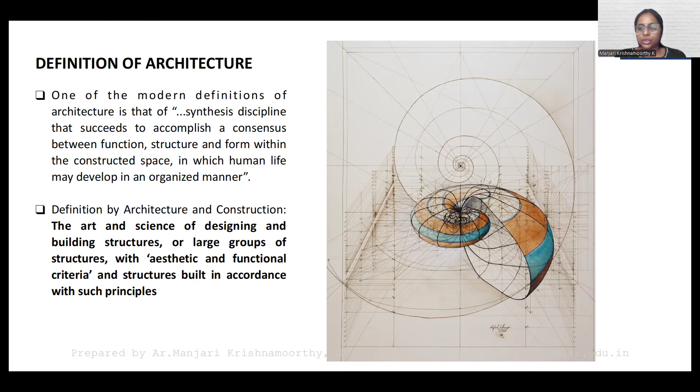So, talking about the general definition of architecture, it is also the art and science of designing and building structures. And also, it need not be just one building structure, but a large group of structures. It will also have aesthetic, functional criteria, and structural components in accordance with several other principles that we will be studying.

So how do we actually approach the definition of architecture? It can be an organic entity, and it can have multiple components. For example, like how a human portrays himself - we dress up, we have accessories, we have shoes. Likewise, a building will also have an entity where it has a form, a function, a structure, skin, and several other materials used, and it will have circulations - a basic character that identifies the building or the built structure.

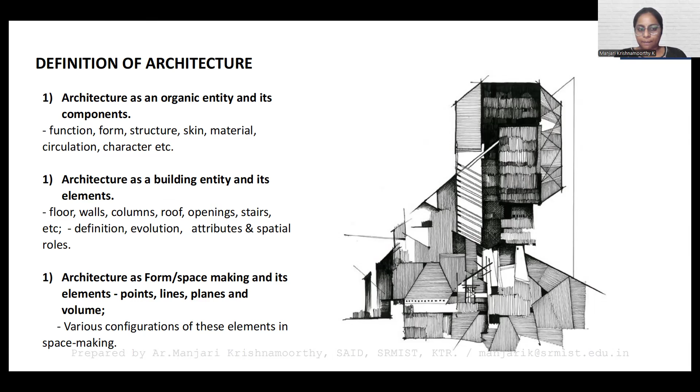And it can also have several other elements. When you talk about a building, it will have floors, walls, columns, roofs, and several other attributes. Talking about the way in which it takes form - is it a rectilinear building? Is it a circular building? That is the way of how space making or form making happens. And this will have components of a line, plane, and volume.

So where exactly did architecture start? Talking about the origin, we all know how human evolution has started, about how humans started living in caves and how from caves we have transformed into different mediums of shelter. So when shelter comes upon, that is the natural way of how we improve man's action with the configuration of the land that we get. So we started living in huts, nests, tents, and then we started making our own structures, built forms as such.

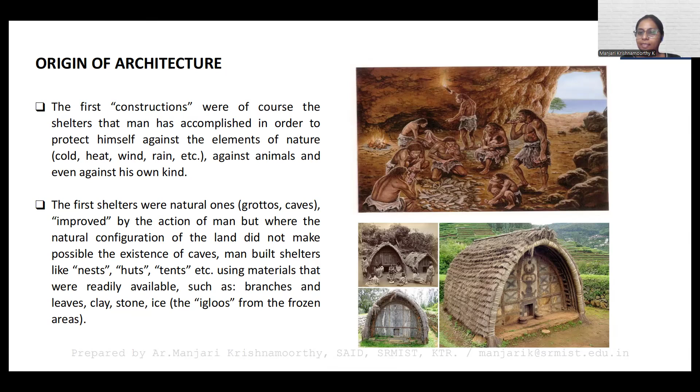So, based upon different situations and different climatic considerations - in a place like a desert, we started finding shelter in caves, whereas in the cold region where ice is, we started building igloos. So trying to make the composite of what exactly the built and the surrounding situation is all about - that is how the evolution starts.

So this goes on for generations and generations. In the first generation, approximately in 3000 BC, we started knowing about the ziggurat forms in Mesopotamia, and we also know the palaces of Babylon, all the Hindu temples of India, the pagodas, the palaces of China, Japan. So all these, the Mayan and the Inca civilizations have monumental temples that are there in ancient Greece. These are categorized as the first generation where the origin of architecture began.

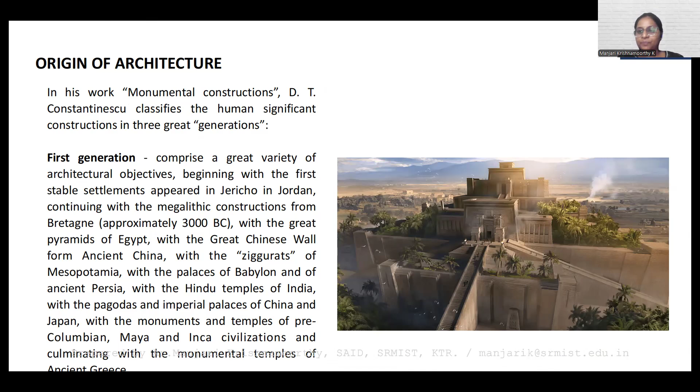And in the second generation, we started to explore more about building materials - not only stone construction, because that was locally available there. So from taking the basic constitute of stone, we started making bricks, handmade bricks. That becomes the masonry type, the concrete. So that's how, from the basic structural element, we started developing into different architectural typologies.

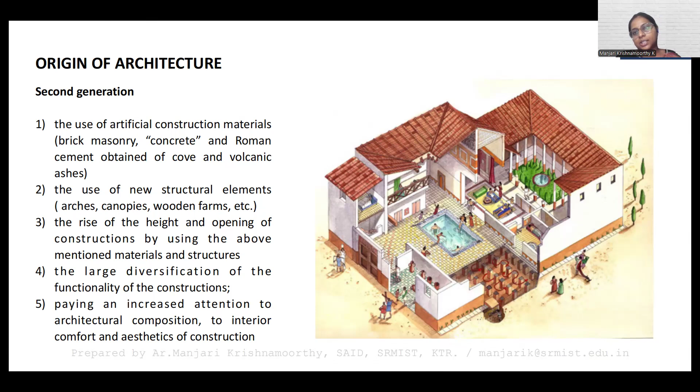Whereas arches started to be built using wood, and we also tried to raise up the shelter - so the covering that the built form would need. This is how the diversification of the functionality of construction technology had started in the second generation. Whereas in the third generation, we started to explore more about technical advancements that we have, like how post your industrial revolution, machineries had helped us.

Reducing the human load, but also increasing the productivity.

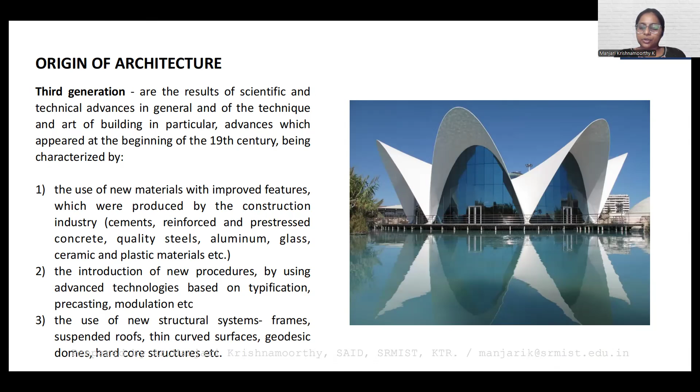So in the 19th century, what happened? We saw new materials like glass, cement, quality steels, and aluminium improve their features in the construction industries. Applying these technologies, we influenced our materials into advancement, with typologies of precast, modular structures, space frame structures, exploring different forms. These are categorized in the third generation. This is how we have seen the passage of evolution.

Talking about the context, what exactly does a human need? A human will have basic requirements—either influence, whatever I see, wherever I get inspired or influenced. That will help me lead to a concept or a style.

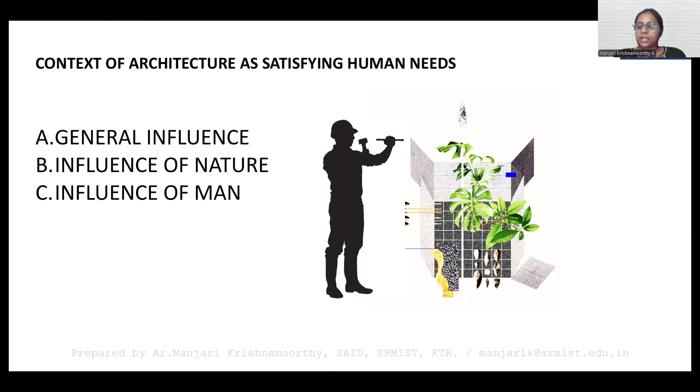And what does nature give? We are not totally depending on the aesthetic side, but also trying to observe what nature gives us and what we give back to nature. And the influence of man—what are my likes and dislikes? These are the categories we personify ourselves into as human needs.

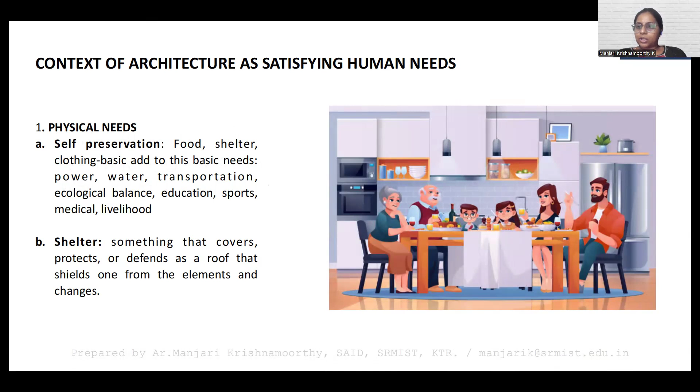Talking about physical needs—what do we need for survival? Basic clothing, transportation, power, electricity, ecological balance between nature and environment. We need good education, medical facilities. Above all, this happens under a shelter—the basic necessities a house would need.

Just by building a structure, we won't be in comfort or safety, but we will also need aesthetics and some protection, in the form of construction. This can be doors of different types, sanitation facilities, and windows, because we need maximum natural ventilation, air, and convenience.

When we design, we always consider the movement or circulation within the house—how do I move from living to the dining space? How is the kitchen closer to the dining space? That proximity gives convenience to the users living there, and that gives us comfort. For example, in a hot region, air conditioning will be one solution we look at, giving comfort to the user's criteria.

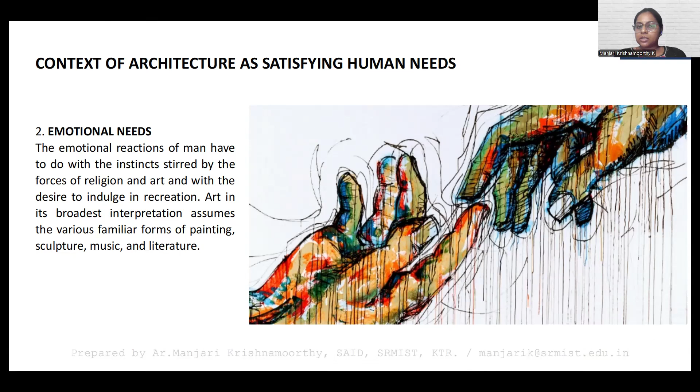We also have emotional needs—the preferences that a human would have. I might like my room painted blue, or I might want a rustic feel given to the structure. So humans also have emotional needs, which enhance creativity but also give equal comfort when they get exactly what they need.

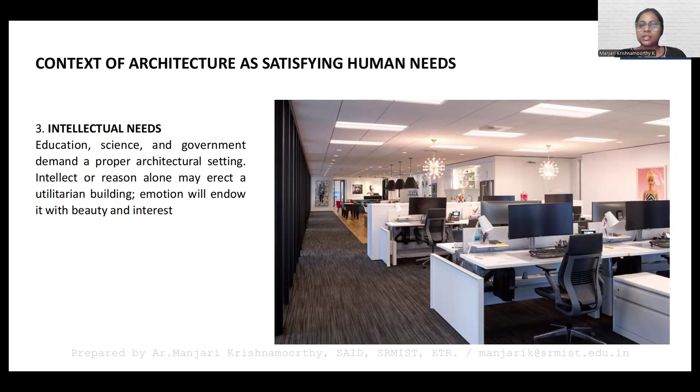And intellectual needs—apart from any building setup, we also have an intellectual part. It has to be a utilitarian building, meaning buildings used by humans that solve a purpose, while also trying not to compromise the beauty or aesthetics of the structures or interiors.

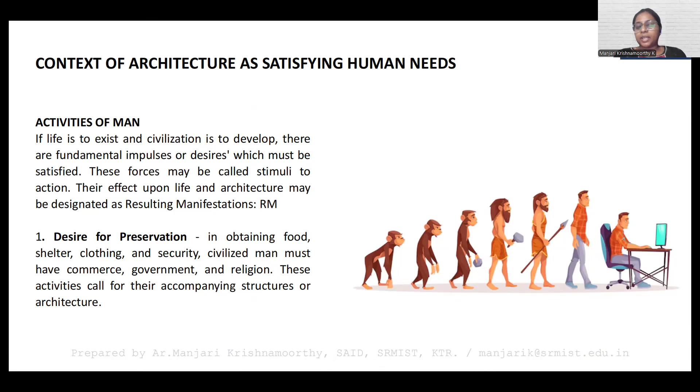Talking about the whole context of how architecture has evolved, we observe certain points like how we aspire to be—starting from the desire of preservation, meaning starting from clothing, the type of civilization we live under. We also have recognition—any man will have a status, position, or ambition toward their social and societal life.

So we will have a struggle in gaining a position, and we always try to keep upgrading ourselves. From a person, we develop into a graduate; from a graduate, you get a job. There has to be some evolution that takes us through all these communities.

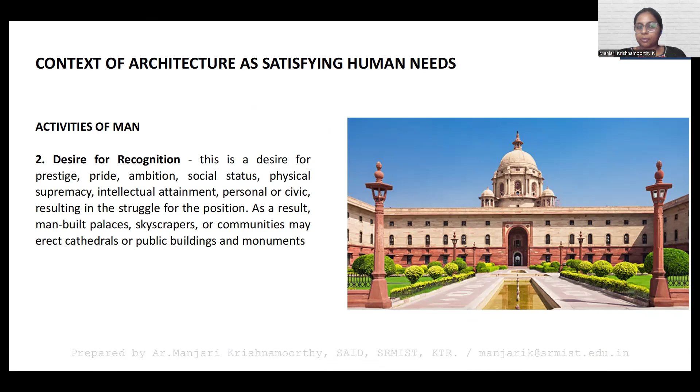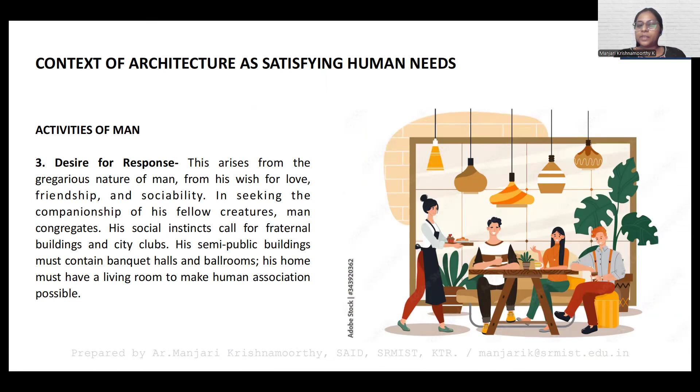And also desire for response—meaning we try to have a bonding with the local, build companionship with our fellow creatures who are with us, and build more semi-public buildings. So not only as a personal confined space, but also trying to have a whole living within the existing society.

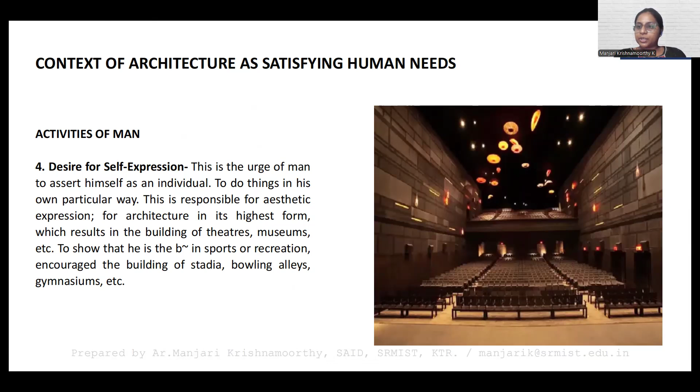And also self-expression. Self-expression is the urge of a man where he asserts himself as an individual. So at the highest level, we try to build other aesthetic facilities like theaters, museums, all these public spaces, sport arenas, which will always try to habituate. For example, I might have a habit or passion towards sports. So all of these semi-public buildings will also provide for self-expression, where we are trying not just to confine within living walls, but also to explore.

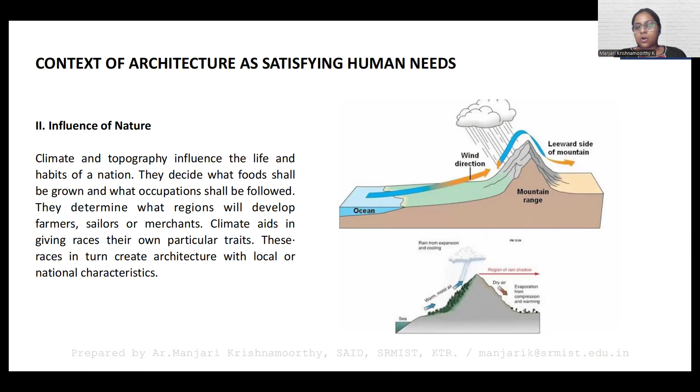And then on top of all of this, there has to be an influence of nature. Without nature, we cannot live or coexist. So climate, topography, all of these influence our life and the habits of a nation. What kind of climate do we live in? What kind of seasonal changes do we adapt ourselves to? So all of this creates an architecture with local and national characteristics.

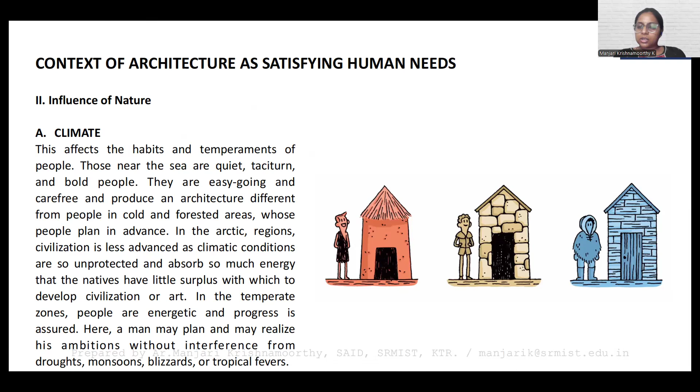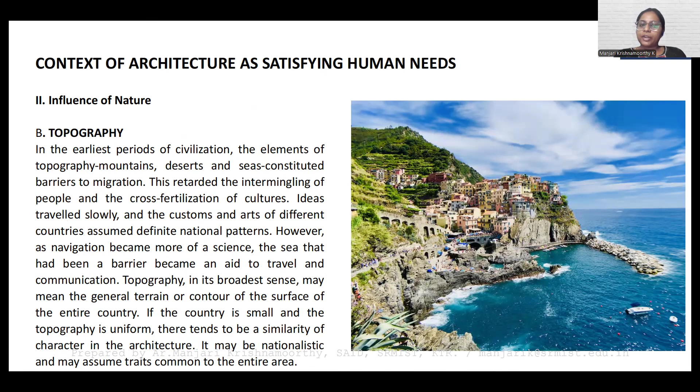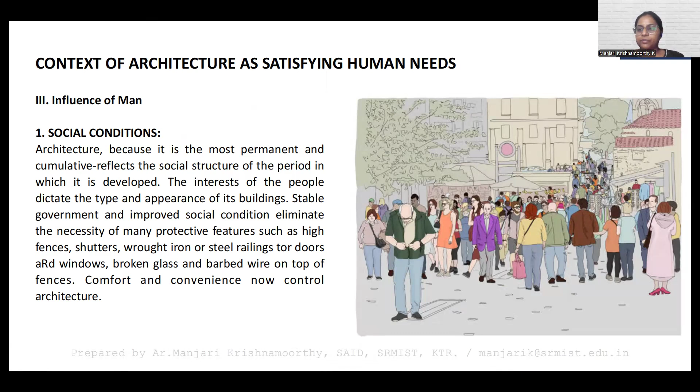And the social conditions of man, where we try to have permanent settlement and also reflect the social structure of a period that is developed. You can also see how people can dictate the appearance of buildings - if you take the city fabric of Amsterdam, you can see the language of how the buildings are throughout, but they have similar characteristics retained throughout the whole city. That exactly helps us understand the social condition.

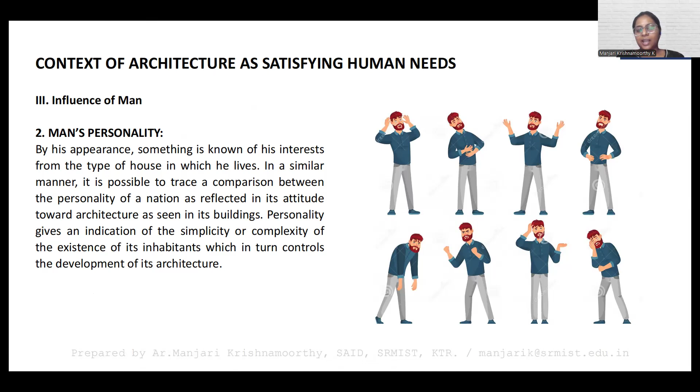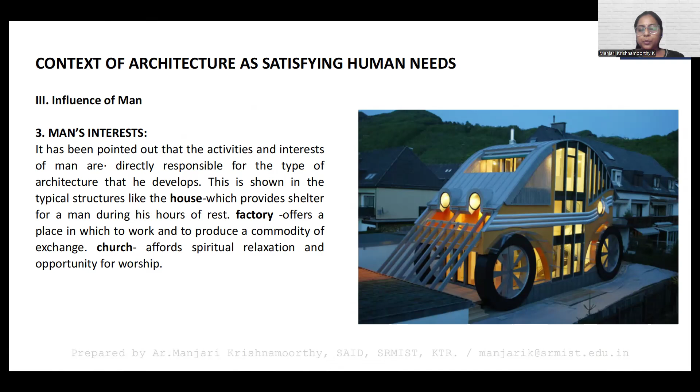And then the human personality. If you compare yourself with the personality of a nation, where exactly do we live, and how does architecture affect them - either in a simple way or through the complexity of how the existing inhabitants try to control the development of their architecture. And then interest, as you can see in this image, like how I want my house to be - I want it to look like a very minimalistic structure. If you take the example of Robert Venturi, he created something like a duck house where the structure itself resembles a duck. So everybody has their personal preferences in how they want their structure to be - that exactly is man's interest.

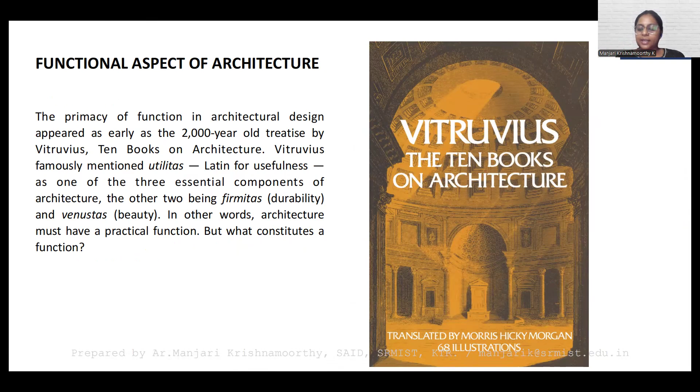So now we are getting into topics of how exactly all this theory begins. This is an example of a very useful book, and we also have the book by D.K. Ching, Form Space Order. These are the bible books that any architecture student would definitely need for reference. Throughout the passage of the 5 year course, these are reference materials to understand the basics and fundamentals.

So this helps us understand what exactly is function, what exactly is your user - who is your user, and what does he need. So use, and now we are going to see points of how the functional aspects of architecture exist - use, user, and function. Function can also refer to intentions where you're trying to use the space and what kind of activity we perform. So everybody can have multiple activities going on in their space.

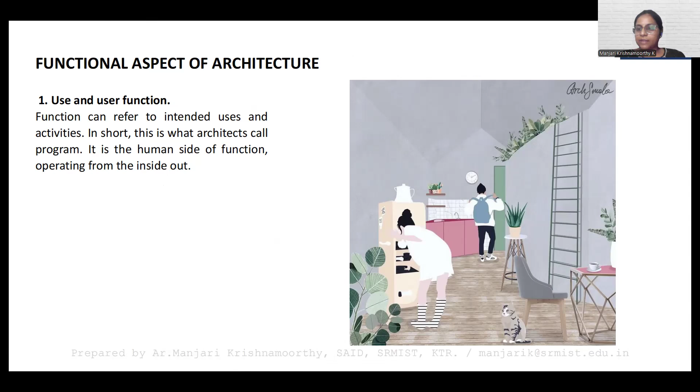You have a reading corner, a TV space, you might have an indoor court. So the function changes from the whole space.

The technical part of it, the technical function, where you see structural and mechanical systems are very important and crucial, which is the main constraint talking about your site and how we develop the requirements and what are the building technologies that we need in current date trends.

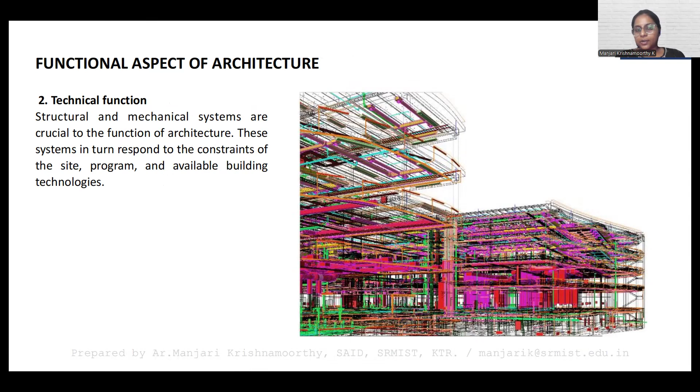And environmental consideration, so we do not forget how we start. Whatever we do, there has to be a response towards the environment and the context. That's why we always do a site analysis before we get into the projects. We will thoroughly study what is the local climate, what are the environmental aspects that need to be considered in our project development.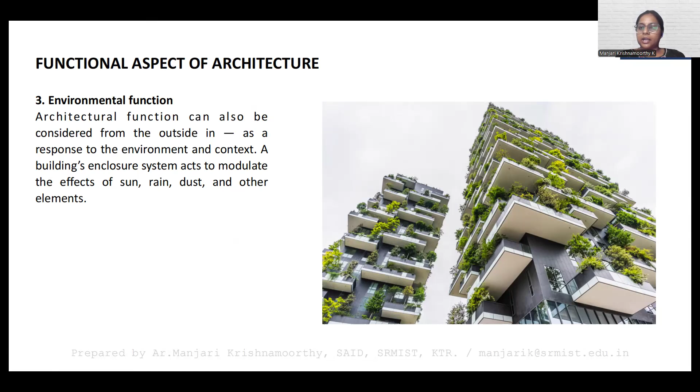And also talking about your economic function, there are two approaches we can see. There's the regional way, where you have a response towards climate, conservation of materials, locally available materials - this is the economic, sustainable approach. You will also have basic investment done, where you have MNC turnkey projects that can be taken over for large scale construction, where the functional level will also have a business logic, where you see lots of apartments being built where you invest some amount of money. So those are the economical ways.

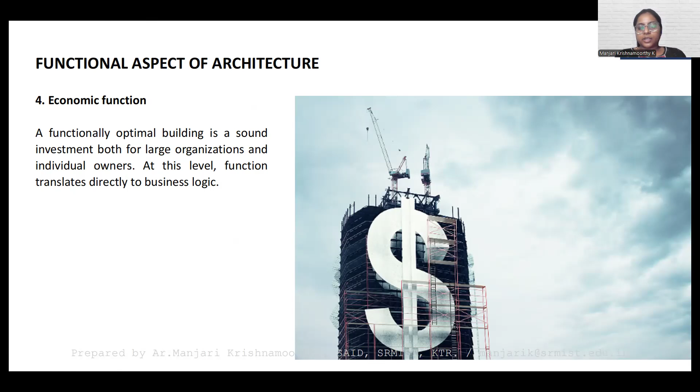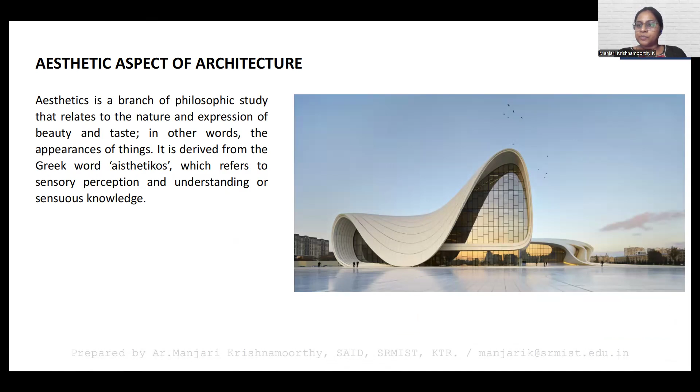The next we see the aesthetic approach. The aesthetic - how do we try to have a philosophic study over expressing the beauty and the taste of the structure, instead of just building very mundane structures. We will always try to bring in new techniques, something very unique about our design.

So when we categorize all these points of the aesthetic aspect of architecture, all of this is mastered by the designer basically following the key points. The first one would be mass, space, proportion, symmetry, balance, contrast, pattern, decoration, and massing. We will be seeing all of these key points in detail.

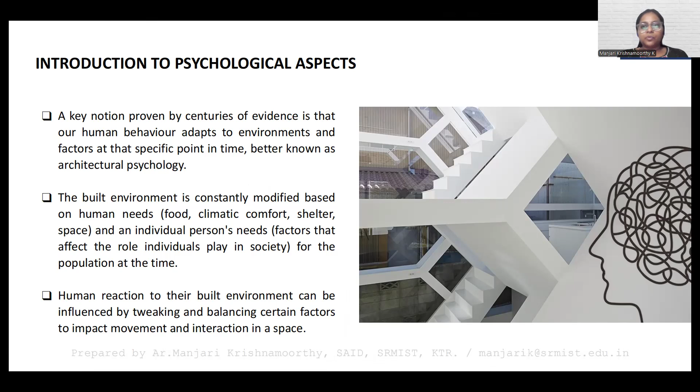The psychological aspect - how is the built environment trying to base on our human needs? What are the factors an individual would need to play a role in this society, and how we also concentrate on the population at the same time. How color impacts, how light impacts, and how spaces create a sense of security and danger, calmness, comfort, frustration, fear - all of this coexists within the user's preference.

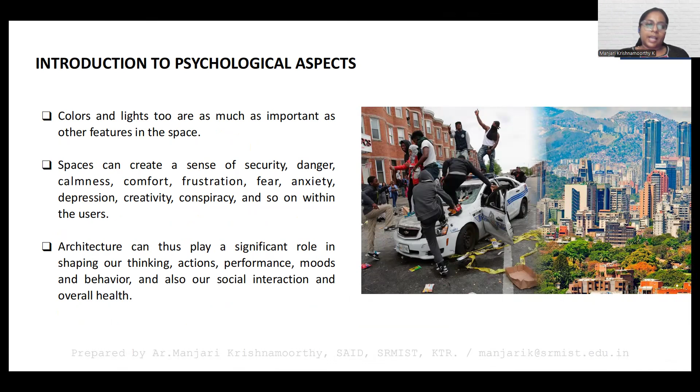Architecture is all about its significant role in shaping our thinking, actions, performance, moods, and behavior. So now we are going to see what are the architectural components that we will be requiring. Before, when we know about architecture, we try to deeply understand what is architecture, not only just designing buildings, but we're trying to figure out the roots of it.

The first one will be the site. Site is basically a place where the construction takes place, where we will have the work. The land or area will be designated for a specific development where they try to propose a building. Site will also have a site boundary or definition of the area in which the building or space will be designed, and the architect will design the structure based on the site conditions.

So each and every site will be unique. You might get a square form site, you might get a very weird form, linear form. That depends on your client's requirements or the existing conditions. It can be a contour site, it can be a lake facing site, it can be placed on a cliff - all the complexities differ from one place to another.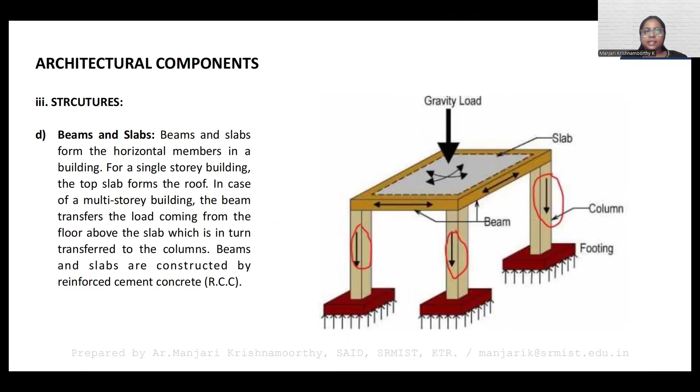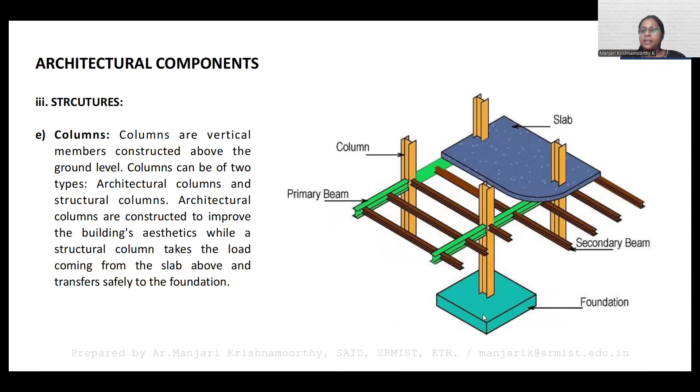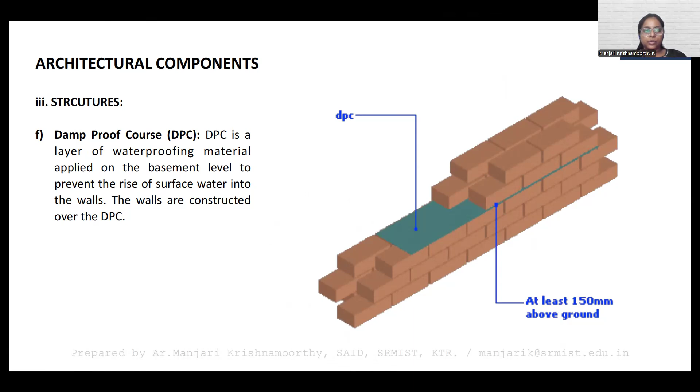And here you see a slab, and this is the foundation. Damp proofing, or damp proof course, is nothing but a layer of waterproofing material that is applied on the basement level to prevent the rise of surface water into the walls, so it will not get so much water content on the structure. So the walls are constructed over the damp proof course. At least 150 mm above the ground will be your damp proofing course, which is basically protection.

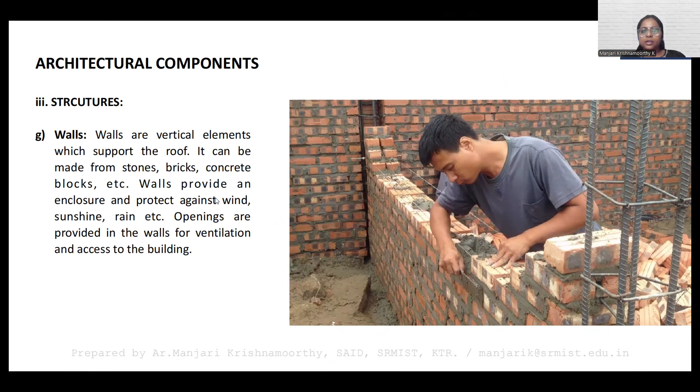And then you have walls. The walls are the vertical elements that give our divisions - like how if you build walls, only two rooms can be separated. So that is basically the defining element that creates an enclosure and protects against wind, sunshine, and rain. And the openings provided in the walls will also provide ventilation and access to the buildings.

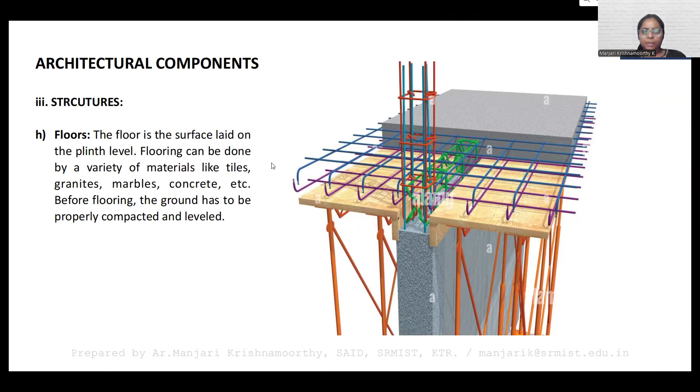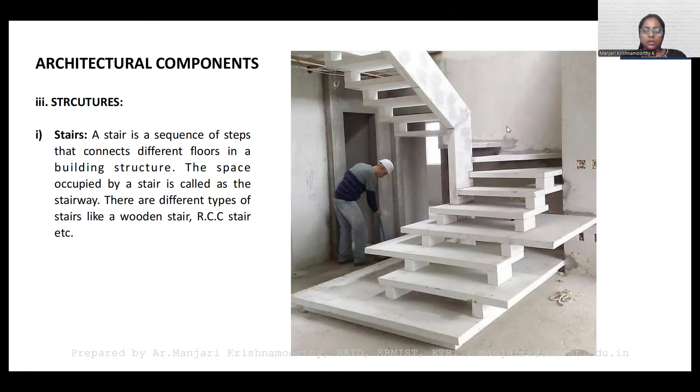And then staircase. Staircases are the vertical transportation from one level to another - a sequence of steps that connects the ground floor to the first floor and several other floors. The space occupied is called the stairway. You have different types of staircases - it can be a wood stair, RCC, and the form of staircase will also change - you have straight flight, dog legs, etc.

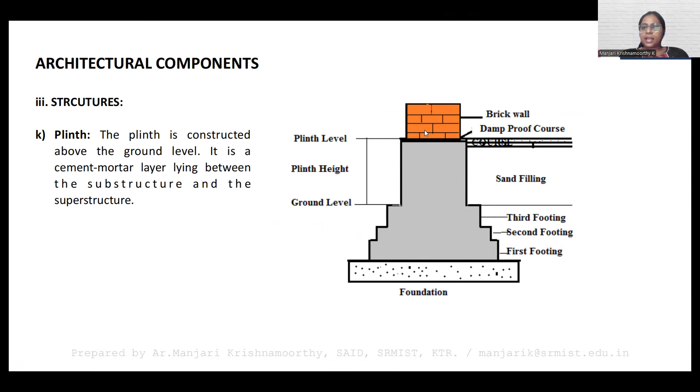So you have a foundation laid and you have three levels of footing - first, second, and third level of footing - which is going to strengthen our base. Here will be the ground, and then you will have sand filling. Here they will try to have the plinth height, basically 0.6 meters or 2 feet, and then on top of that you will have a brick wall and the damp proofing course.

Foundations are the structural unit which uniformly tries to distribute the load from the structure to the underlying soil - only then will it have strength from the base earth to the structure. That's the first structural unit that we will be constructing in any building construction. So a good foundation is the settlement or the baseline for the structure.

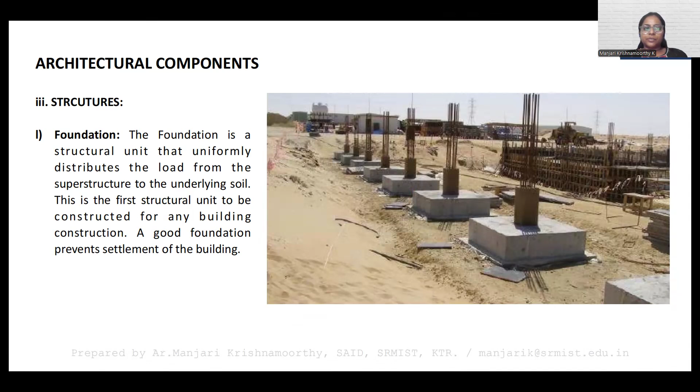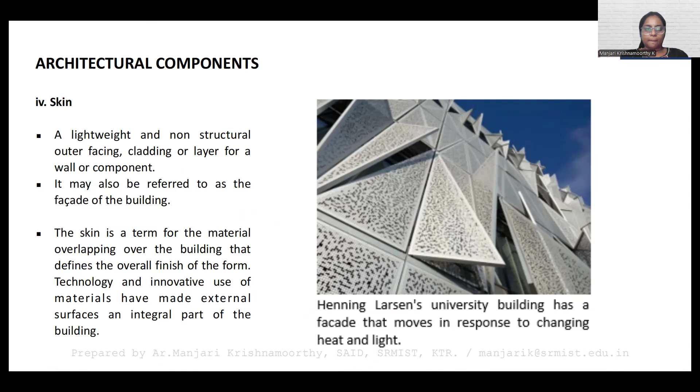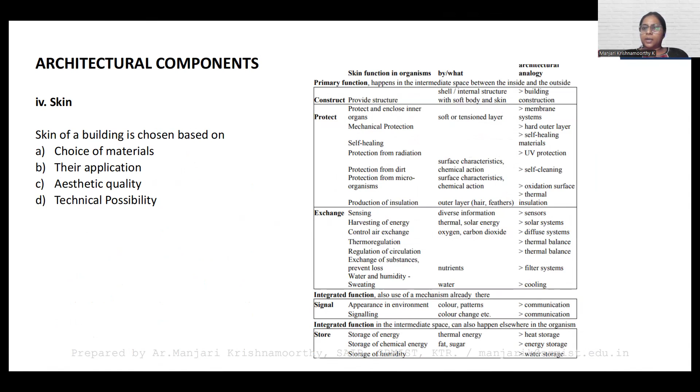One example is your Henning Larsen's university building, and you can also observe this in your Pearl Academy of Jaipur, where they also have a facade skin. The skin has different other materials, application, aesthetic quality, technical possibilities, where each and every skin will also act based on different purposes and different other integrated functions.

Here you can see different examples of how they're trying to have influences on the exterior. It also created an openness, but also created a closure towards their structures. This is the Ohio State University, where you can see the water plant has been used to create an enclosure. So the main important feature is the functional aspect of linking the skin and building facade. The second skin is compared to the biological creature.

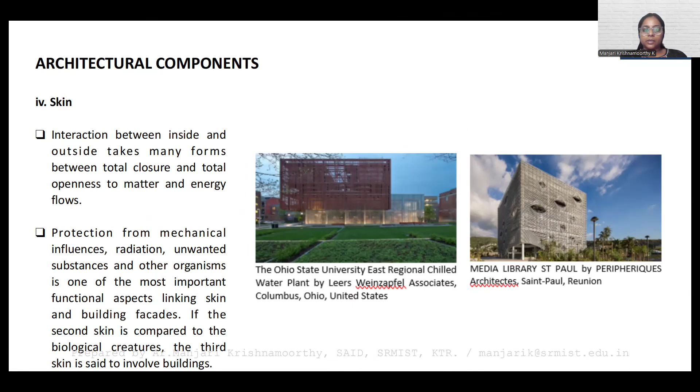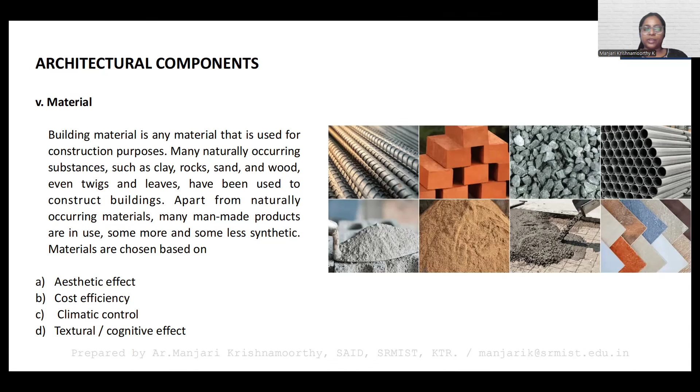The third skin is to involve the buildings. Materials, as we already see, what are the different types of materials being used? Clay, rocks, sand, wood, even twigs and leaves. All of these are considered materials which are naturally occurring as well as man-made products used in the current day market.

So these materials are chosen based on different factors: aesthetic effect, cost efficiency, climate control, textural and cognitive effects. Talking about materials, you will see the invention of steel after the industrial revolution. Steel was one important building material, the strongest and also the primary structural material for skyscrapers and large scale tall buildings.

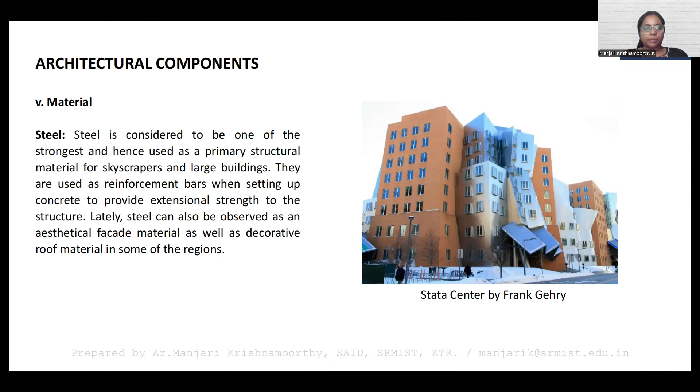So this provides the extensional strength to the structures. Lately, steel was observed as an aesthetic facade material that can also act as a decorative roofing material in some regions. This is the Stata Center by Frank Gehry.

And concrete. Now, how in India fundamentally concrete was a new material after architects like Louis Kahn and Le Corbusier tried to purposefully use concrete as a building material, but also tried not compromising the aesthetics of the structure. So this concrete has different attires and functions, and concrete production has been observed to have the highest carbon footprint, which later pollutes the environment.

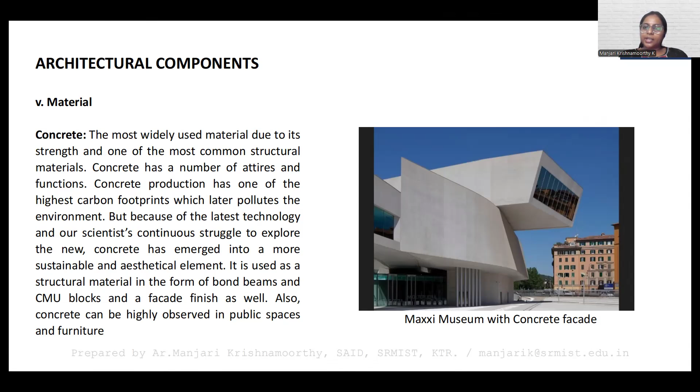The latest technology shows scientists trying to explore how concrete can emerge as a more sustainable and aesthetic element. This has different constituents, like bond beams and CMU blocks, which give you a facade finish, so you don't have to repaint or refurbish your structure. You can leave it as such, so it remains very brutalist in nature.

Glass. We all know the transparency that the material gives, and also the lightweightness, which directly helps us provide daylighting into the space. Through technology, we are also trying to invent new materials of glass, like low-E glasses and electrochromic glasses, which reduce transmittance by 90%, resulting in lesser glare and higher energy savings. That is why glass is being used in most IT buildings and many other skyscrapers.

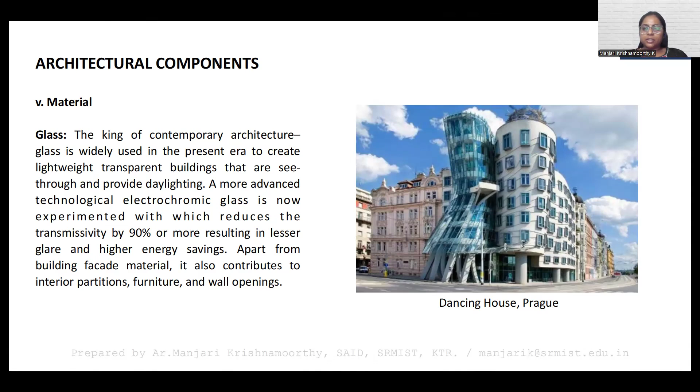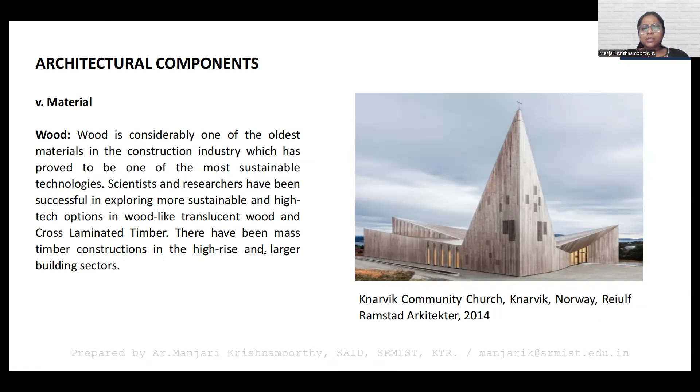That is how we try to use the materials efficiently. Wood is considered one of the oldest materials in the construction industry, which is now provided with the most sustainable technologies, including mass timber production. Stone construction is also very diversely used, starting from the beginning of different evolutions of generations.

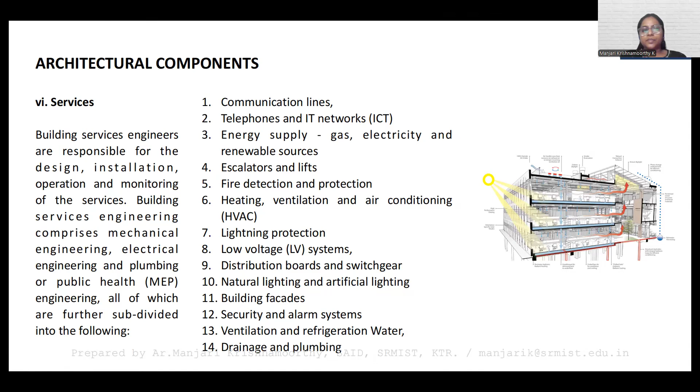Other architectural components include services, electrical lines, MEP engineering and mechanical services, communication lines, escalators, and lifts, all of which play a key role as services for the building. Circulation is where you try to always have movement from one place to another, either vertical transportation or horizontal transportation.

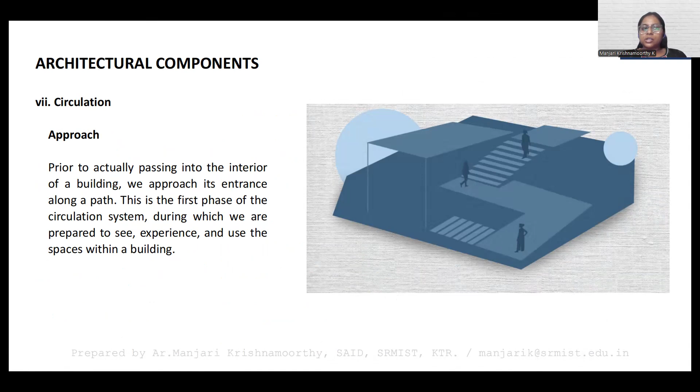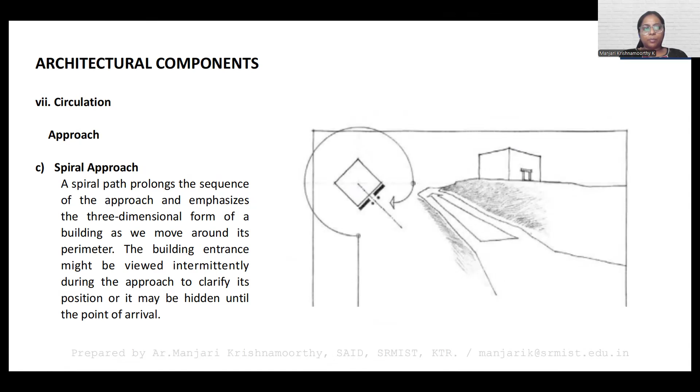Approach can be a direct approach or an oblique approach. These are the ways in which the circulation system helps us experience the spaces within the building. Frontal approach, oblique approach, where you have a perspective that is redirected before you approach the building. Spiral approach, where you always take a turn, move around the perimeter, and try to have an opening towards that.

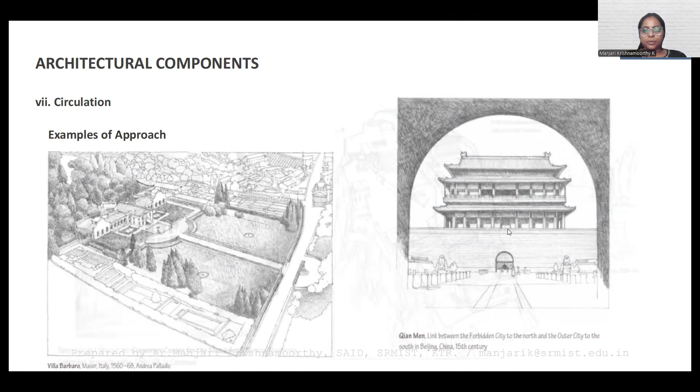So these are a few examples taken from the book called Form, Space, and Order by D.K. Ching, where these examples directly help us understand how entries work. All these diagrams are taken from that. This is an example of a direct approach, and here you can see an oblique approach and different entrances. These diagrams help us clearly understand how we move from one place to another.

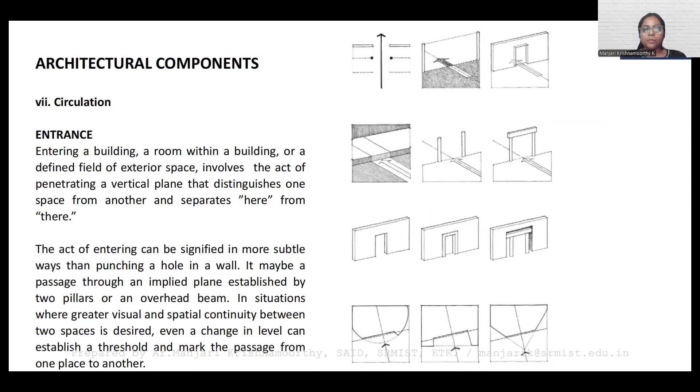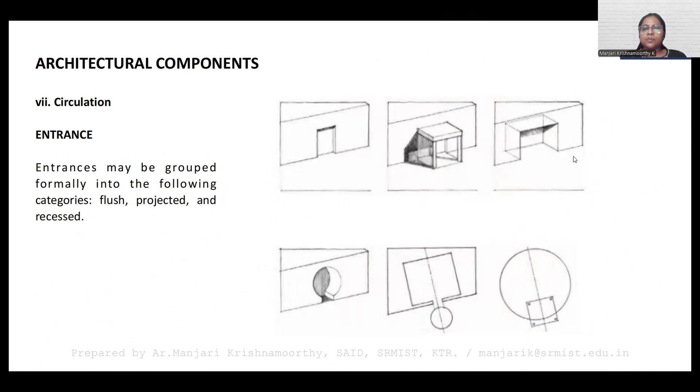These are the different types of openings where you can see a spiral, an arch, and a circular entry where some articulation is done. This is a projected eave, and here you can see there is a recession. So these are called flush, projected, and recessed.